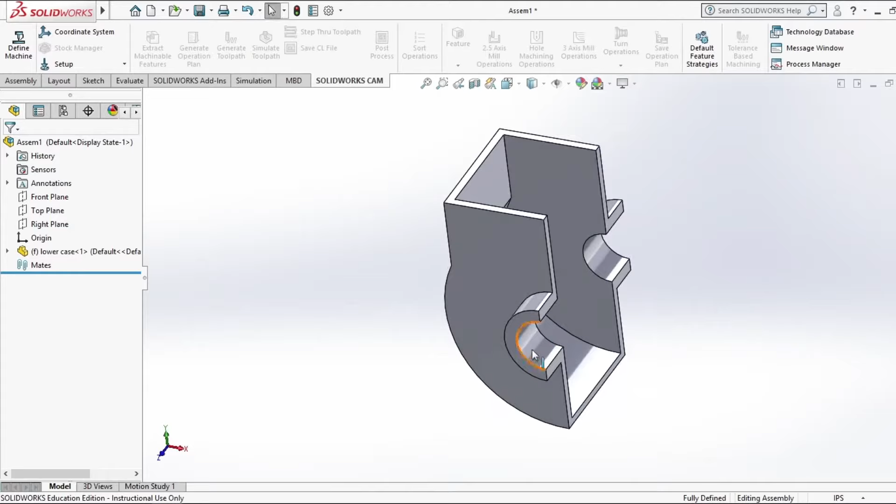So this piece cannot be moved. It is fixed. If I left-click on it, you can see it gives me the option to float it, which is how you can tell something is fixed. You can also take a look at the fact that it says fully defined, so we know this part can't go anywhere. This is a great place to start out with.

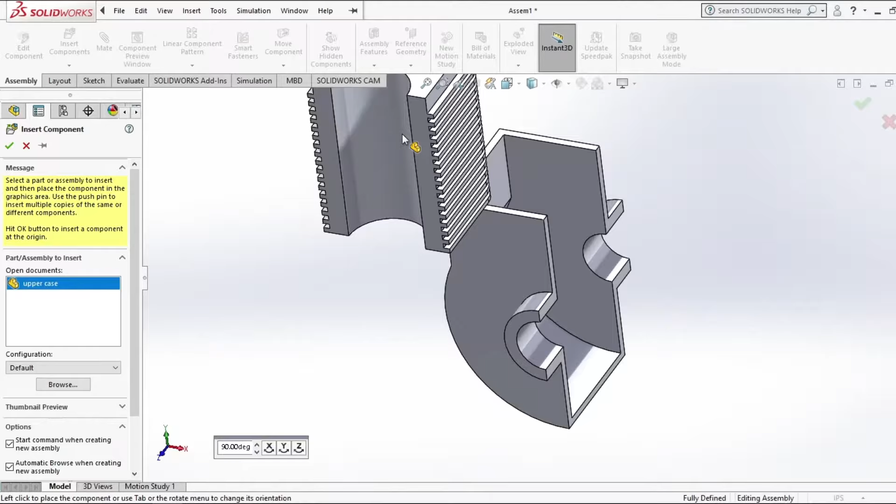So the next thing I'm going to do is insert another component. I'm going to go a little faster this time since this is something we've done before. So I'm going to grab the uppercase and drop it in place. The uppercase is actually the same, both top and bottom — it is symmetric, so we don't need to worry too much about it.

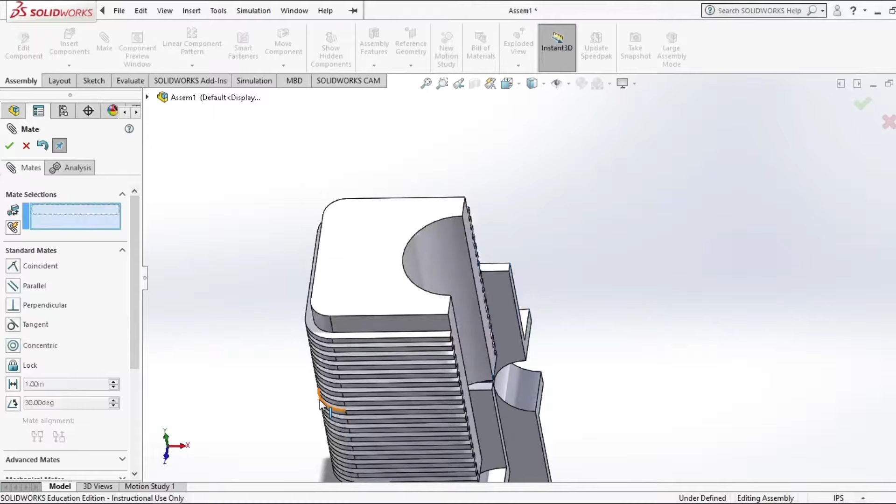So I'm going to choose the bottom of the uppercase and the top of the lowercase. I'm going to mate these two faces together and flip them so they're in the right direction. Luckily for us, they are exactly the same width, so we can just hit that button and everything lines up nice and neat. So that is how that is assembled.

I know that's got a sharp edge, but I wasn't feeling particularly good as a designer this week, so feel free to give me some flack for that later. So that's in place, fully defined, nice and solid. This is the case for the engine that we're building today.

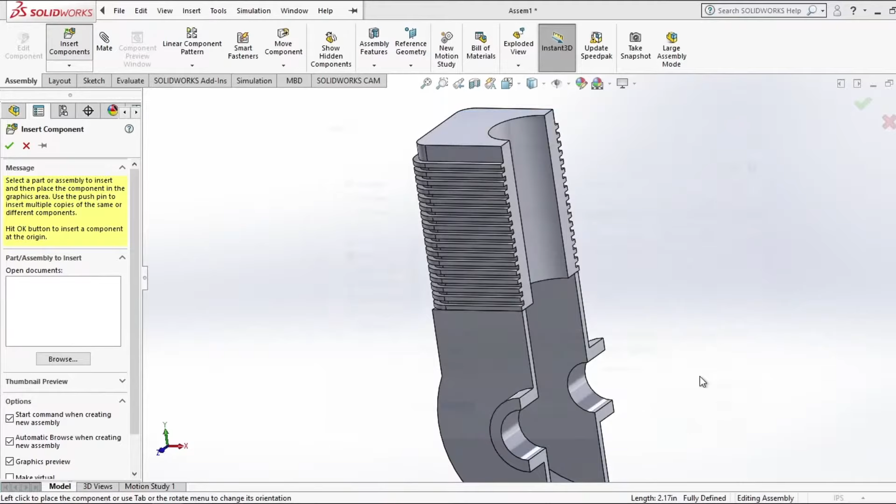So I'm going to hit mate, and insert components, and add in the next component we want to work with — in this case, the crankshaft. The crankshaft actually controls the crank directly, so we're going to come in.

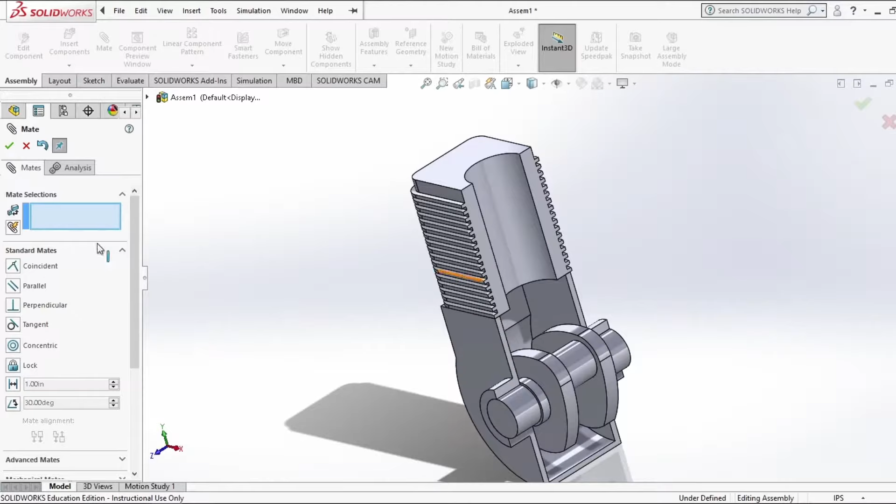I'm going to mate my crankshaft circles, and mate my crankshaft exteriors. If you've done everything properly, it should just spin in place right now. You'll notice it now says underdefined, but that's okay because it is where it needs to be. The next thing we need to do is use the actual crank itself, the crank rod.

So I'm going to drop that in place. This is a tricky mate to do, and there's two reasons for that. First and foremost, if I try to make this a coincident mate, I'm going to actually do that so you guys can see it. Do not do this if you're following along, until I tell you to jump back in.

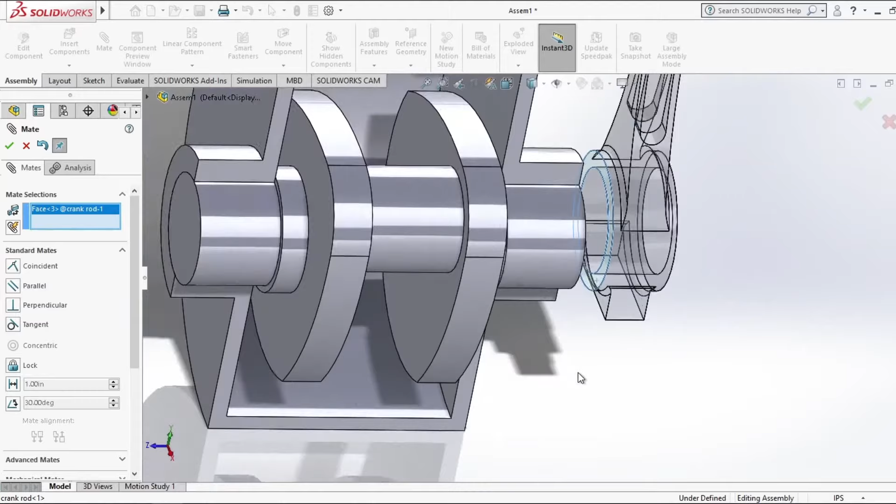I'm going to make this a concentric mate, and then I could hypothetically just go up to this wall, but the problem now is that the shaft I'm working on is not centered. You can see it's really off onto the edge. So while this system does work and it'll turn and do all the things I want it to do, this just isn't right because that's not where it's supposed to be.

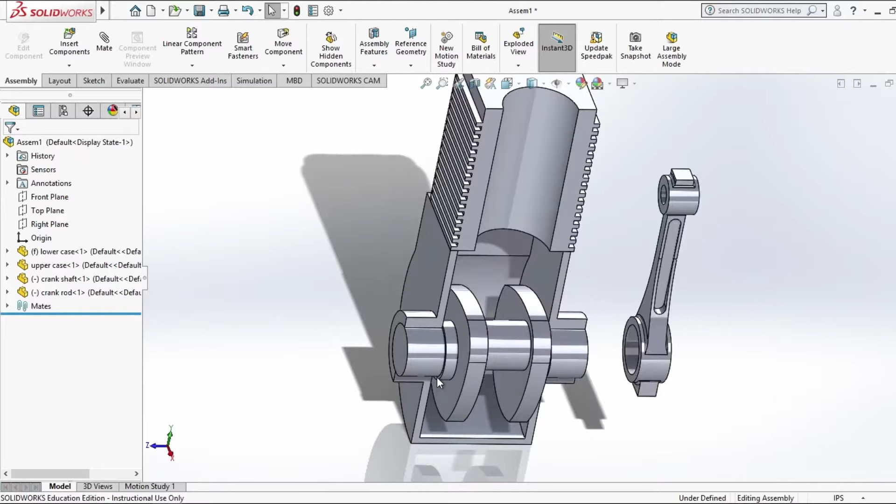So I'm going to actually undo everything I just did. It's going to get a little mad at me. There we go. And now, if you're following along, this is what we're going to be doing.

I'm going to start with that same concentric mate. That's important to make sure it stays on the shaft, and that way as this rotates, it follows along with that. But rather than use these mates, or a parallel mate, or any of these fancy mates, I'm going to go down to an advanced mate. In the advanced mate, there's this option for a width mate. The width mate actually lets me place two objects directly in the center of one another.

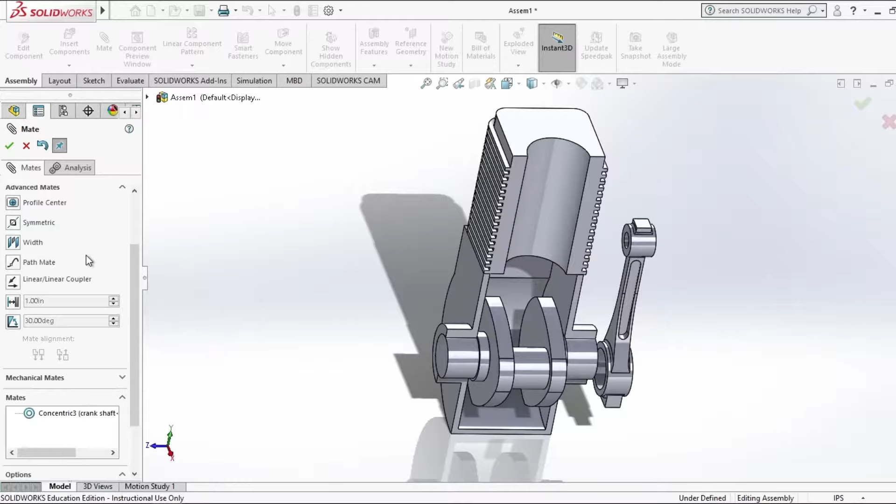So what I'll do is choose both sides of the crank rod, and then choose both interior sides of the crankshaft. You'll see right there, it's actually lined it up perfectly down the middle. This is a really useful mate for whenever you don't want to have to do measuring or get too crazy with it. You can just kind of center something and call it a day.

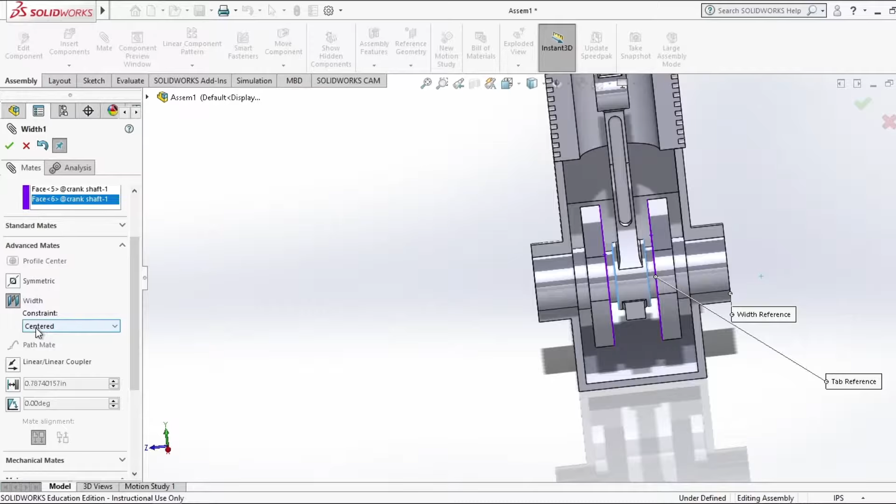There are other mates we could use for this that get into that - we could have a cam mate, or potentially even a hinge mate, which would work here. But we're just going to stick with that width mate because it's really nice and easy, and we can center it and it behaves very, very cleanly.

So I'm going to hit OK. And now you can see our crank rod is loaded onto our crankshaft. So we're in good shape, everything is sort of coming together. We've got one more part to add in here.

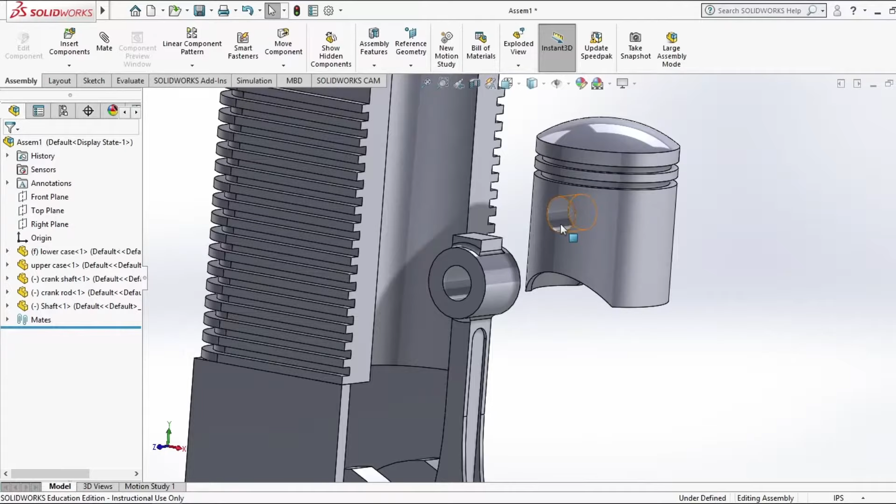I'm going to insert components, and grab the physical shaft itself - this is often just called the piston head. And we are again going to do a concentric mate. So this is how those will be mated together.

And then I'm going to mate the piston to the piston shaft. There we go. And so now this entire system is actually nice and neat and super clean.

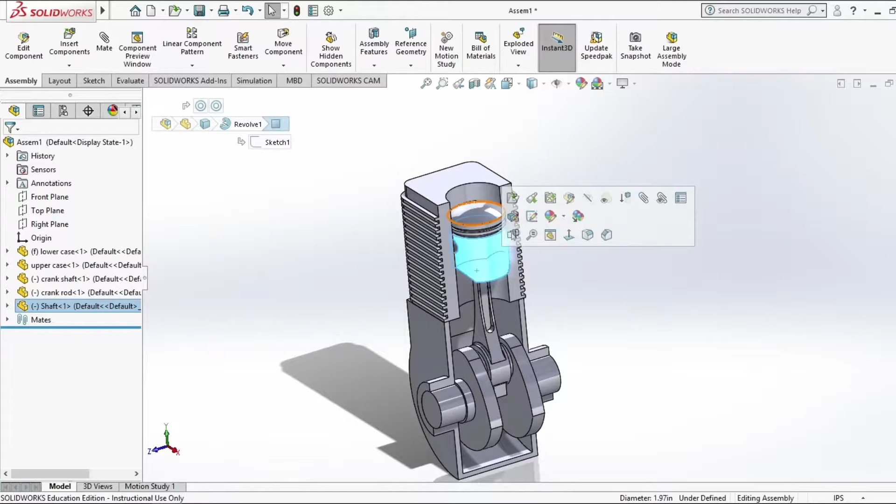I can come through and rotate this system, and see kind of how this reciprocating engine would work. So hypothetically, if this was a real engine, you would have some sort of explosion that would push down on the piston, and in pushing down on the piston, I would create some sort of mechanical motion down here. For the purposes of today, we're going to be doing everything from the crankshaft, so we're going to pretend this is just like a model of the system.

So I could sit here and just record my screen as I do this, but this isn't super professional. I want to actually come through and do some physics work on this, and kind of get a feel for how it should be behaving. To do that, I'm going to be doing a motion study.

Before I get into that though, I want to stress two things. First and foremost, to set that up, you have to go up here to your settings options and go to add-ins. You'll see here there's an option for SolidWorks Motion, so you want to make sure that is selected and just hit OK. If you're not seeing that, you can also just go to add-ins and make sure that is highlighted.

Sometimes if you're using SolidWorks, especially on your computer, just make sure that setting is there.

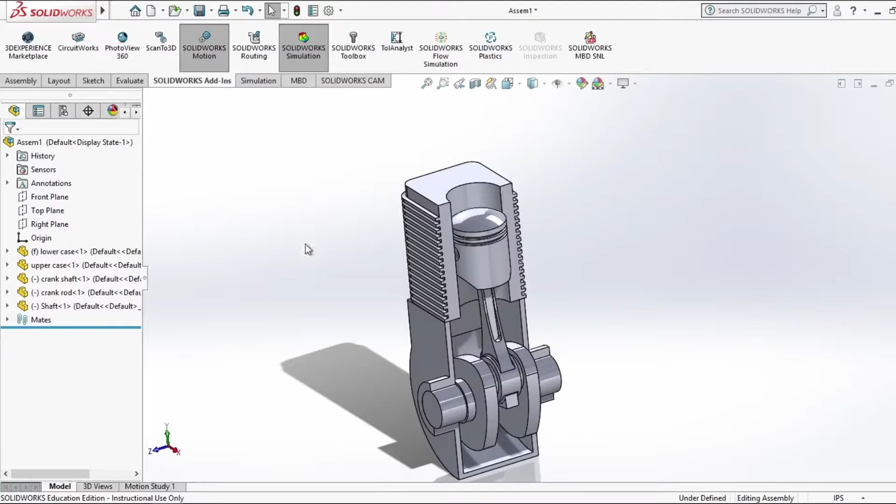When we come down here to motion study, up here on the left, you'll see that this is set up for animation. What animation lets me do is move my part and set a new time frame, then move my part again and set a new time frame, and so on. I can actually play it back to myself, depending on how that works. I did that badly, but the idea is we can go through and do that calculation.

But what we want to do is actually use physics, so we're going to go over to motion analysis. I'm going to load up a motion analysis option and drag it out to 10, so I've got 10 seconds of motion analysis to run. The problem is that while our system is set up, there's really no motion for it to know, because it has no forces acting on it.

So I want the system to have some forces so I can go from there. I'm going to set up my initial conditions like this, and I'm going to use the most basic of forces to work with, which is gravity.

If you'll notice at the top of this pane, there's a ton of different options available for creating different forces. I can add a motor, for example, to the shaft. I could add a spring, which, while this model doesn't have a spring option, could be useful for counteracting some force directly. I could add a damper, which is a way of damping two forces. This is oftentimes seen as something like friction, or you could be using something like a dashpot, which reacts directly to the speed of the motion you're working with.

I could add a force directly — for example, putting a force directly on the head of this piston to see how it behaves. I could even look at the contact behavior, so if I've got a set of gears, I could look at how the teeth are meshing.

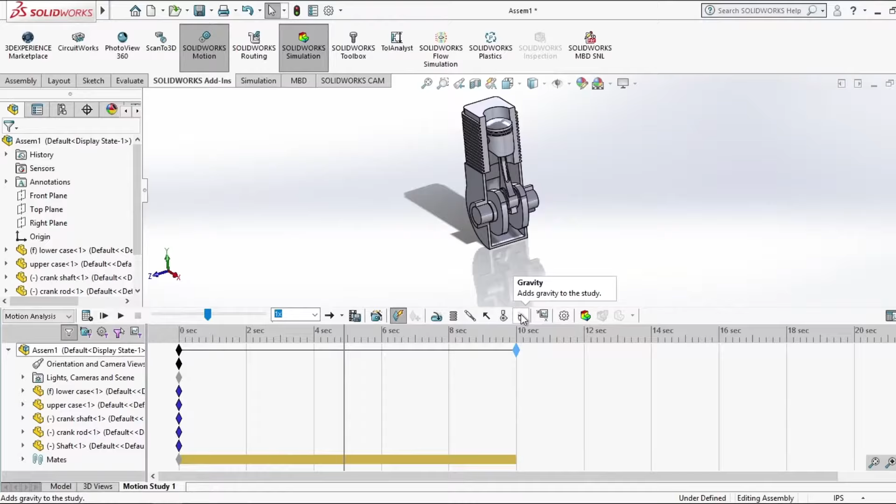But the one we're going to go with, which is just the easiest one, is adding gravity to the study. The reason is that gravity is a nice, easy thing to work with, and more importantly, it's important to add to most of the studies you're working on because it's going to be acting on pretty much any of your parts no matter what.

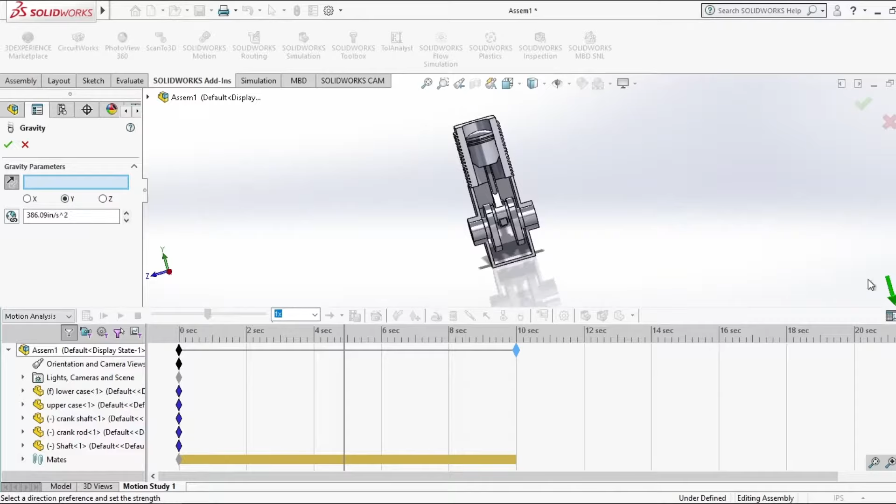So I'm going to click on the gravity icon, and you'll see over here on the right that it creates the arrow for gravity. If we were imagining gravity acting in that direction, not much is going to happen — I want to make sure it's instead acting downwards. In this case, for this model, that's going to be in the Y direction. If your model's hooked up differently, you can always play around with this to make sure it's pointing correctly. Just make sure your arrow is down, or in the direction of travel you want. Then I'll hit OK.

Now that I've added gravity to this, I'm going to hit calculate. This little calculate button is going to go ahead and figure out exactly what this system needs. You'll see that right now it's just rocking back and forth, so I'm going to go back to the beginning and see if it will let me recalculate that.

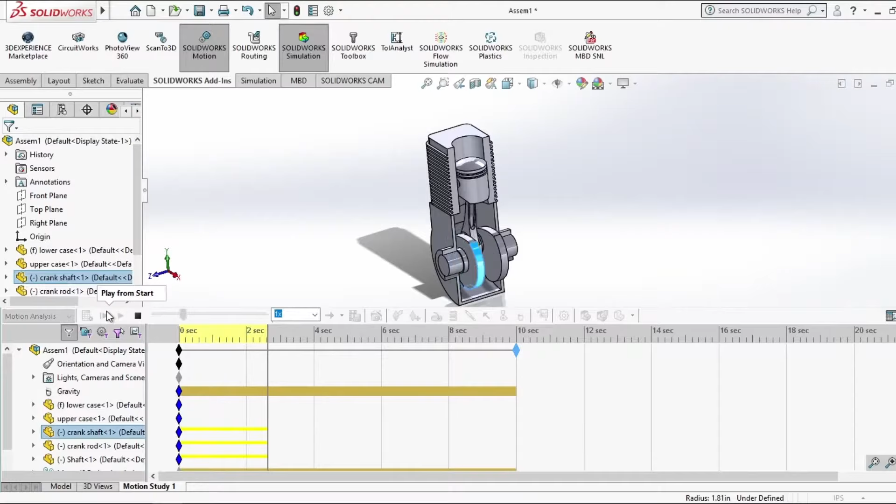There we go, that's better, that's more fun. So in this case, I just went back to the beginning and reset my model.

I can do that over and over again - just drag my timeline all the way back. I actually want it right there, we'll make it real dramatic. And I'm going to hit calculate again, and it'll resolve that calculation from that location.

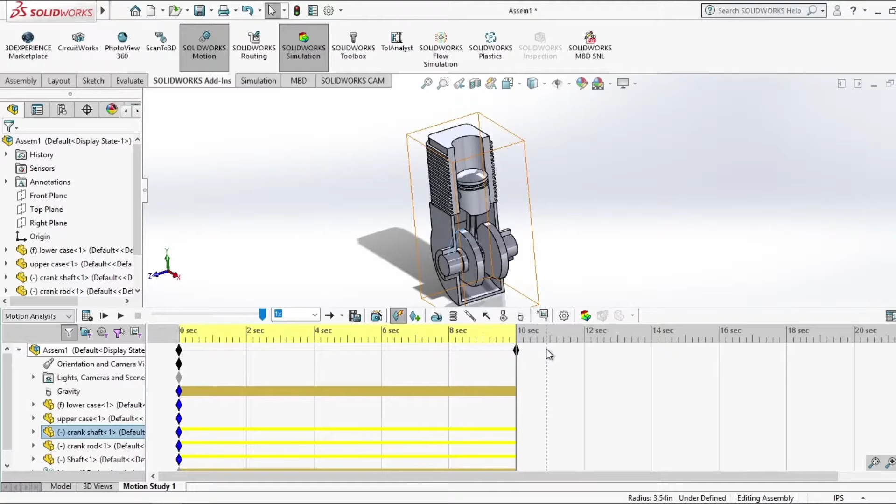So the downside to this model as described is twofold. Mostly, there is no friction, so this is just going to oscillate forever - no matter what I do, I'm going to get that constant back and forth. And second, as I'm looking at this, I realize it's kind of a really gross animation - not really nice and neat.

So I'm going to go over my settings real fast, and increase the number of frames to match my monitor - we'll call it 80 instead of 144. I think that's probably unnecessary.

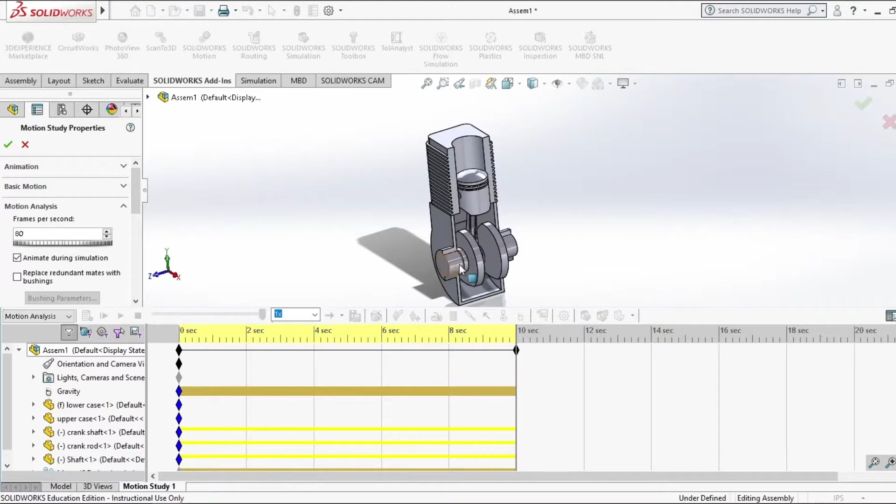I'm going to rerun this simulation one more time. You'll see it goes a little bit slower, but that is a much neater animation. It's not jumping all over the place, and I can get a feel for exactly how it's behaving.

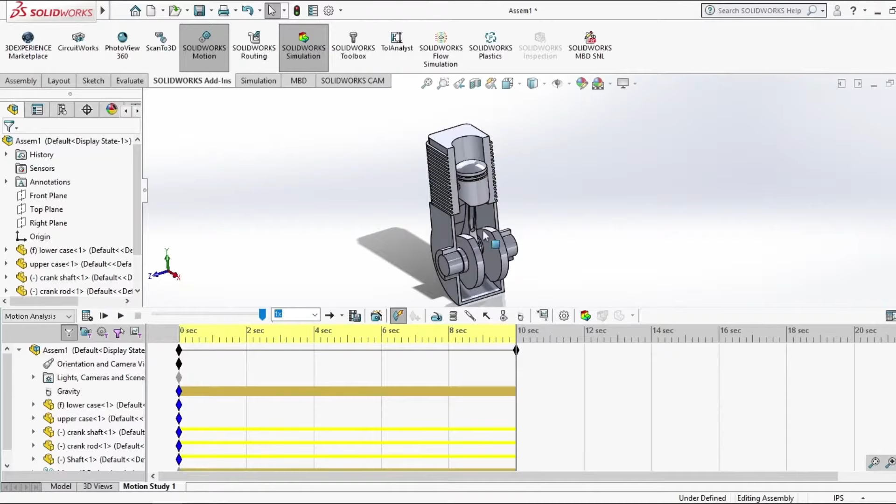Okay, we'll wait for this to finish up. And we can do a couple things here - we can kind of see how this system works just by doing a quick analysis of it as it stands.

So let's come on over here. We're going to hit this little XY graph button, and this is going to let us look at our results directly. I'm going to specifically be looking at the displacement of our model - the linear displacement of the piston itself.

You'll notice there's a ton of different options here - I can look at acceleration, I can look at velocity. Just linear though, that's what we're doing today. I'm going to be looking at the magnitude, the total magnitude of displacement for the system, and I'll just choose the face of the system for my output.

I'm going to hit OK, and it'll show me exactly how much linear displacement in inches this has. So it's displacing from 8.1 inches to 9.6 inches, just going up and down, up and down. This is in relation to the origin of the part, wherever that is.

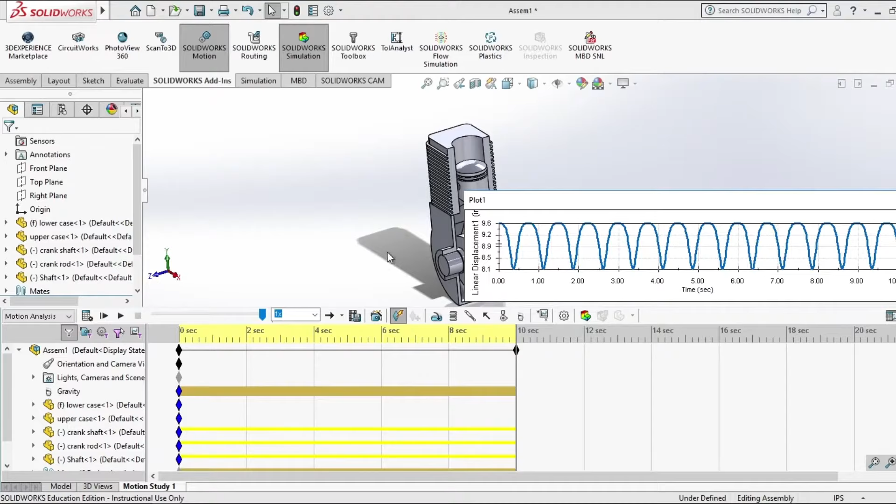All right, this is super helpful, but again, this doesn't look super real. So what I want to do is add a force to this that will compensate for that. I'm going to be adding a damping force, and the reason is that damping forces are a pretty good way of approximating some frictions.

For this problem in particular, I'm going to be using it just because it behaves a little bit nicer. So I'm going to be adding a torsional damper - like there's the big engine attached to this, and it's adding some resistance, and the damper is going to be attached right here.

And as I scroll down, you'll see that it gives me how much torsional damping I have - that's 1 pound per inch, or 1 pound force per inch. That is a lot, like a lot of force. In general, if I was to run the simulation, I doubt it would even move with that.

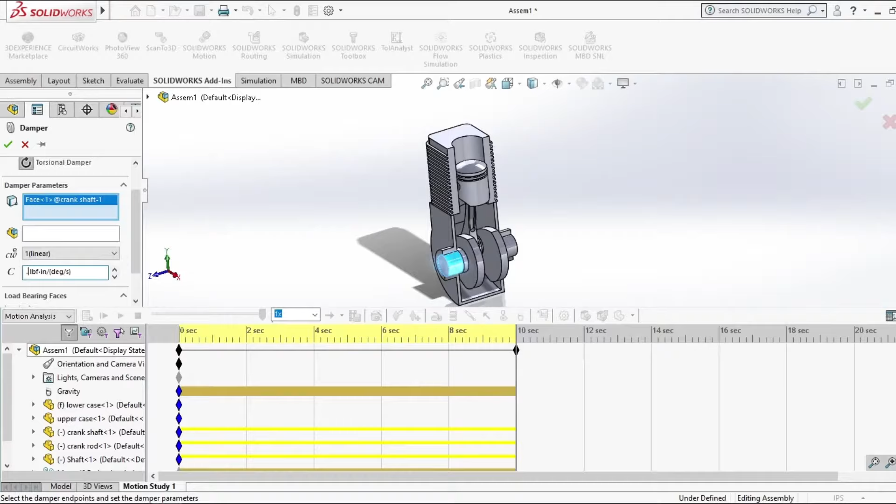So I'm going to drop this down pretty aggressive - down to like 0.001. And you can see how much just adding even just that little bit of damping force changes how this system works.

So I'm going to recalculate from the beginning, and you'll see now it is dropping down. And then the damping force is actually stopping - the damping force is keeping it from jumping back up.

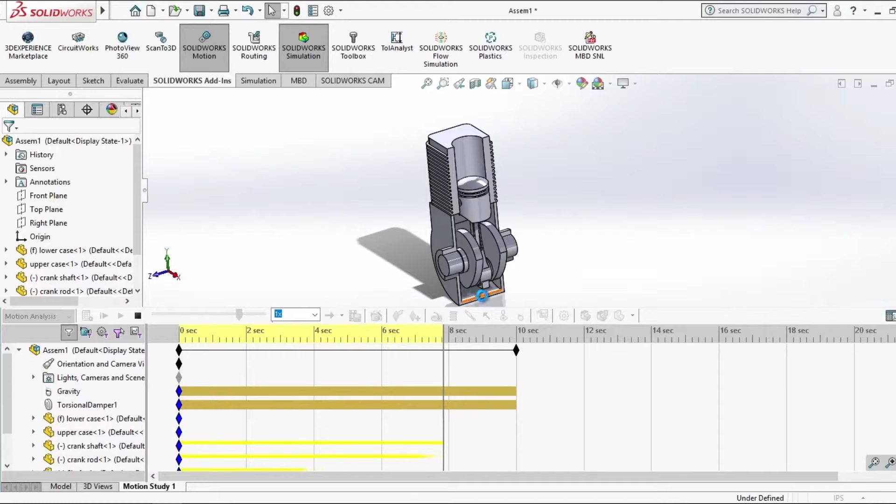All right, so the eagle-eyed among you may have realized that my screen just jumped around a little bit - that's because I crashed VLabs. So make sure to save frequently. I'm glad that I did.

But in general, yes, I'm just going to real fast save this out. We're just going to put that on my desktop as...

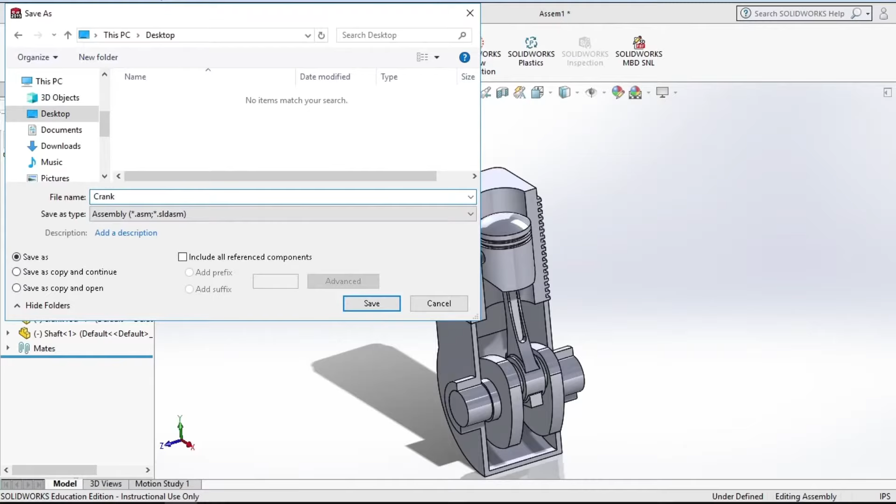I'm sure I won't forget that this is there, so I won't do that again. Let's jump back into that motion study now.

Taking a look at this motion study directly, you can see that I have a linear displacement plot, and it behaves the way I would expect, where it drops down and then hangs out there as is.

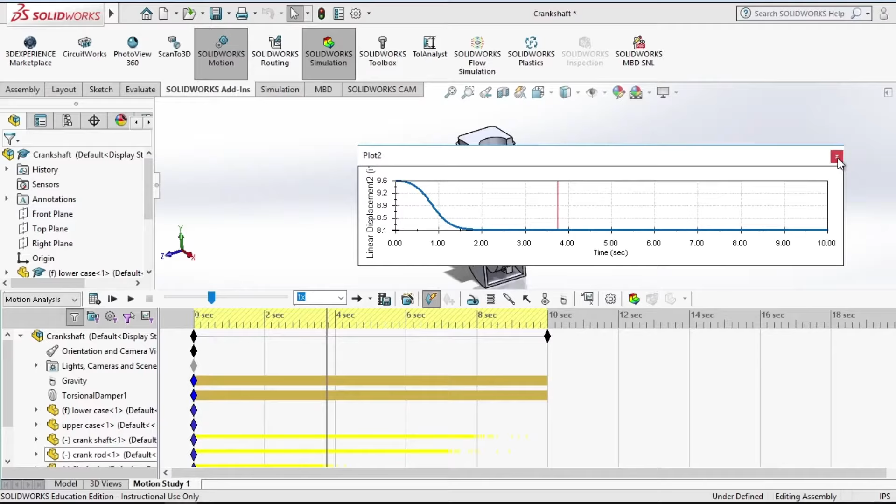This is all well and good, and I can play with it a little bit and say, what if I want my initial condition to be someplace like here? I can recalculate and see how this system would behave differently depending on how things are going.

I can also go over to my system and modify what I am seeing with that damper. I'll stop, edit my feature, and change this value around as I see fit. For example, I could decrease my damping a little bit more by an order of 10, and remodel that to see how we are behaving.

Let's recalculate real fast. You'll see that gives me more of what you might expect from a system with really smooth bearings and no load attached to it.

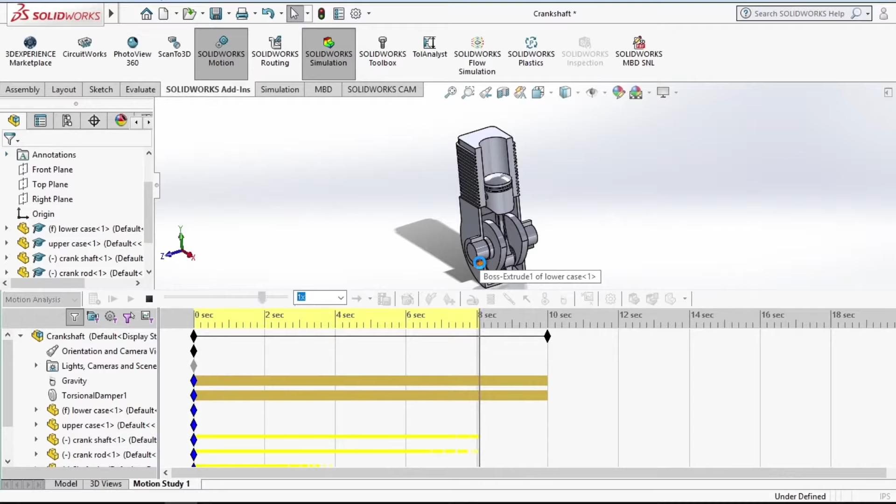That's actually the hardest part of simulation, getting a feel for what is and is not reality. Because sometimes you're going to work on a part and it's going to look completely normal to you, and then you get to the real world and find out none of this works as is.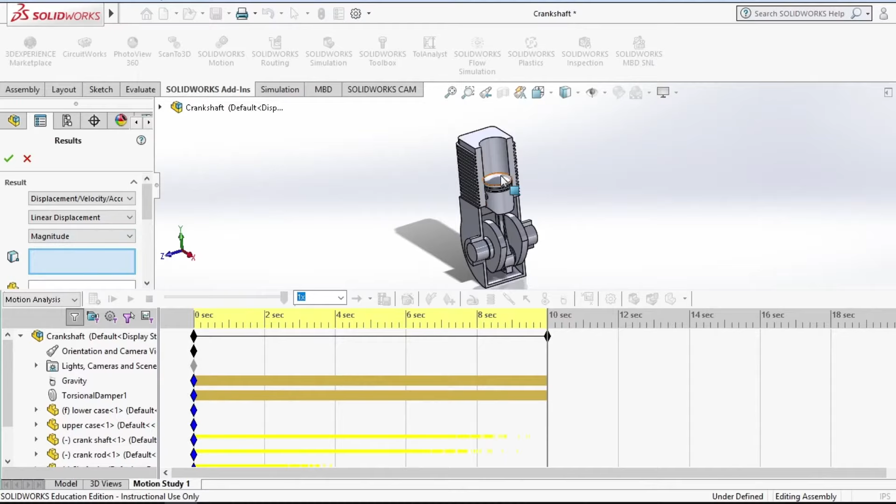But this is the really helpful part of this system, I can come in here and continually check to see how my part is behaving. So I can come back and say, how did that simulation work? You'll see here I've got that structure we just saw, that kind of bounce, bounce, bounce.

I can actually play this alongside to see how accurately it matches or where that's happening, and it'll load that alongside so I can get a feel for where the system's working.

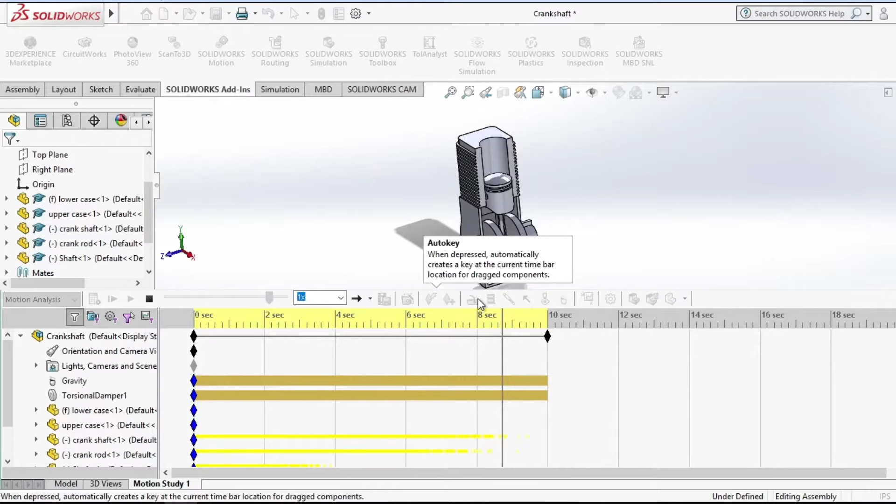This is all well and good, but it's not super helpful to me, because at the end of the day, I really want to determine how the motor would affect this and what that's going to look like. So I'm going to add a motor to this system, and pretend I'm driving this like it's some sort of prop at the Museum of Science.

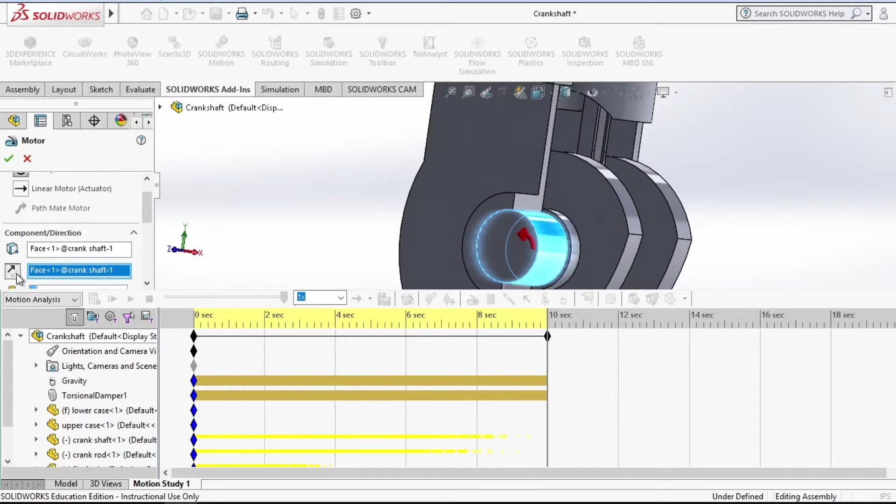I'm going to click the shaft I want the motor to roll on, and you'll see that it immediately gives me a direction. I can change that direction by clicking this over here, but I'm going to leave it clockwise for now because I think that's kind of nice.

I'm going to shrink this down a little bit so we have more window room. I'm going to run this motor at a constant speed of 100 RPM. Actually, let's make that 10 RPM, that's nice and slow and makes things nice and easy.

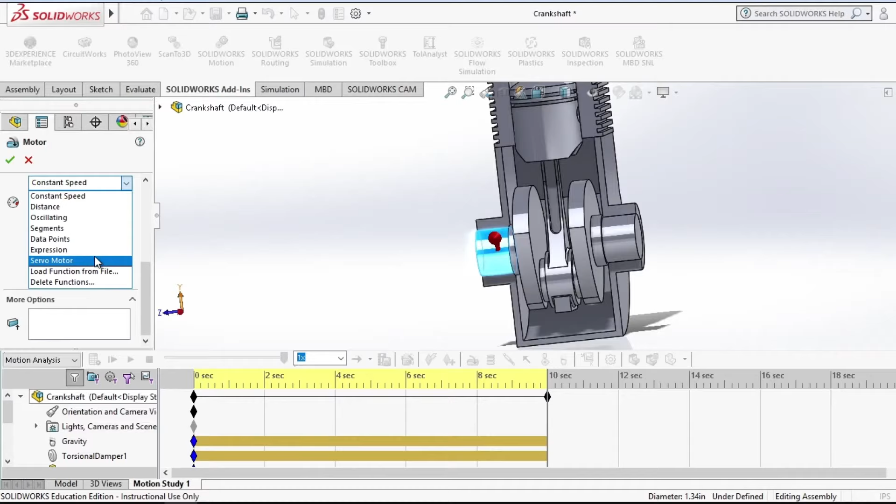You can go ahead and modify this graph to change the actual structure you're working with. So if you've got a specific ramp up or oscillatory behavior, or a servo driving the system, you can do that too, but we're not going to do that right now. So I'm just going to hit OK.

And I'm going to recalculate my model. What you'll notice here is that in this model, the motor is now constantly driving this system, so we no longer see the effects of gravity, but we know that they're still there because we haven't removed them.

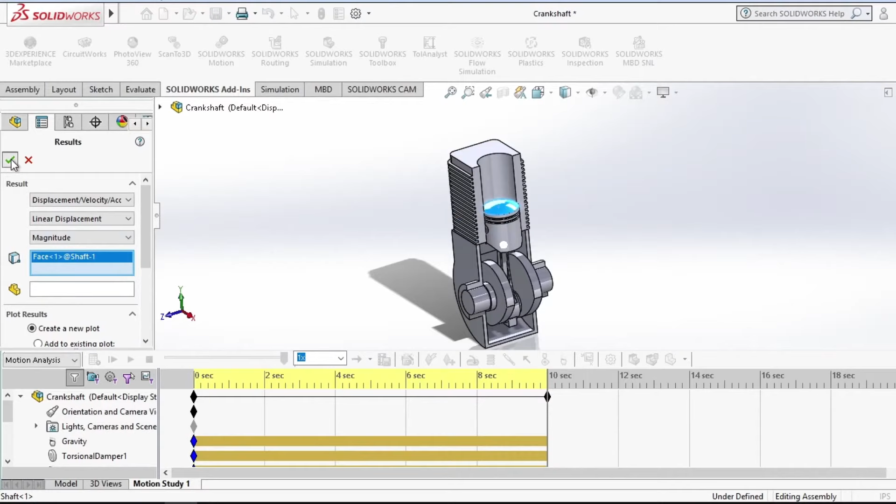Now that I've got the motor driving the system and gravity acting on it, I can look at how the system behaves and say, obviously displacement is going to be kind of a harmonic structure. So let's double check that: linear displacement, magnitude, choose the top there. There we go, we see we got that nice harmonic and periodic structure.

But realistically speaking, the amount of force needed must change based on how gravity is working. So I'm going to go real fast and do that same system, looking at the force instead. I want to know what the motor torque requirements are, and again, magnitude.

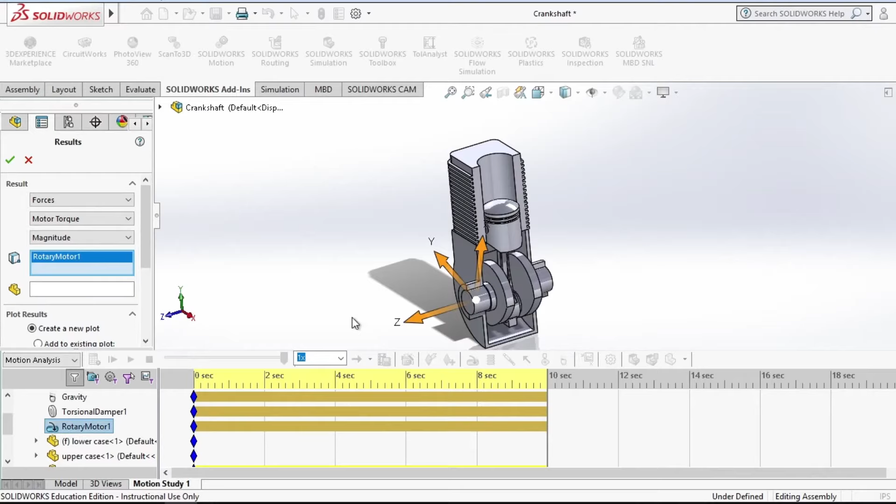I'm going to grab the motor from down here. You can't grab it on the page because we don't have a visual representation of the motor. I'll hit OK, and you can see that this system is now showing me how this piece works.

I can step through this, and I can see that when the piston is higher, I require less force to continue turning the motor than when the piston is lower and pushing it back up. If you think about it, that means the piston's energy is actually being handed back to me.

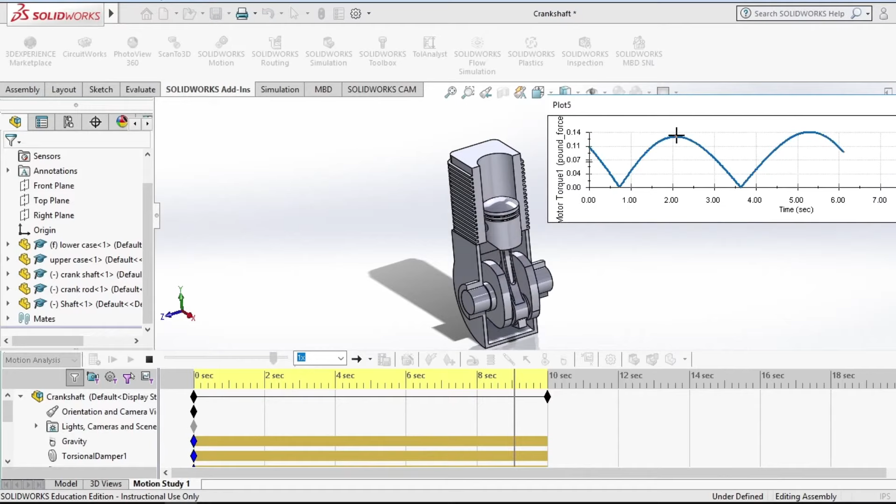So when you guys run the simulation with your own specific values, you'll see that your torque value will change depending on the damping ratio and the speed you're running your motor. All of those pieces affect how much torque is needed to move the system. This is really cool because with just this very simple tool, I can get a pretty good idea for what kind of dynamic structure I've got without having to leave the simulation workspace.

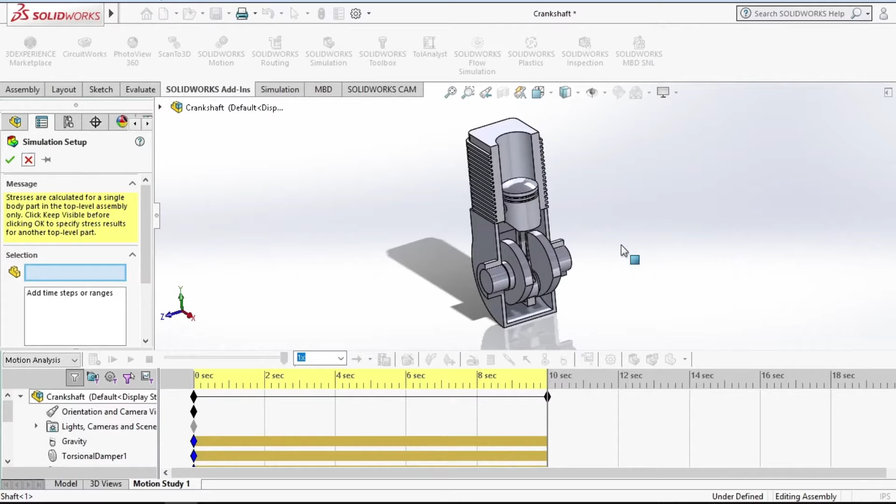Solidworks can do a lot more than this. You'll see over here there's the option for doing actual full simulations, so we can check and see how a material is deflecting or being affected by a specific action. I'm not going to do this because it can be computationally intensive, but we can see the stresses in this part as it's moving, and see the locations where you're going to see the most stress during operation.

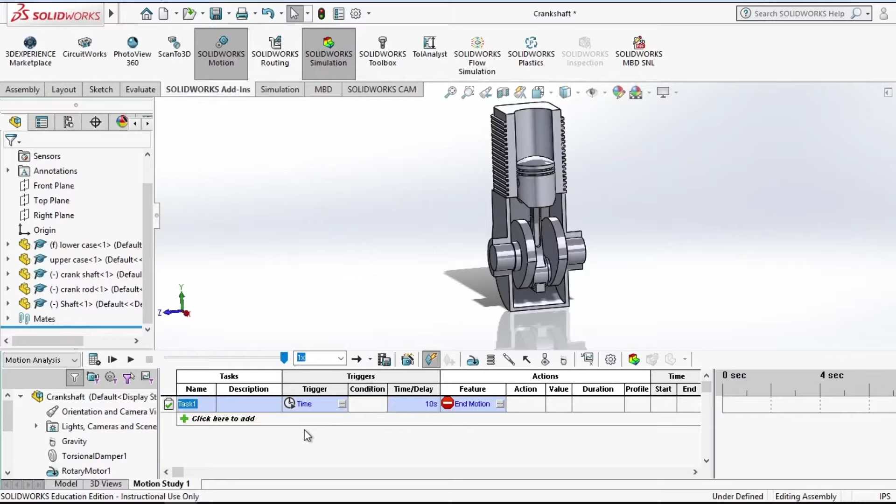You can take it a step further, and if you like automation, you can do event-based structures where you add sensors to this motor and say, rather than try and fire this motor with just a camshaft, I could have some sort of servo motor or solenoid firing my piston, and when it gets to a certain location, I need a fuel injection, and add different tasks depending on how that's going. This is a much more advanced version of Solidworks, but it's really helpful if you're trying to do something like a production line. And you can go even further than that.

You can add additional forces, additional dynamics as necessary. My personal favorite is the contact option because it lets me see how everything is interacting, whether I've got rubbing or parts that are mashing into one another causing them to bind up. I think that's super, super helpful.

So for the purposes of today, your goal is just to get this piece together and make the modifications I ask for in lab. All you have to do is run and give me a quick AVI of this as well as the graph outputs. To do that, we're going to do two quick things.

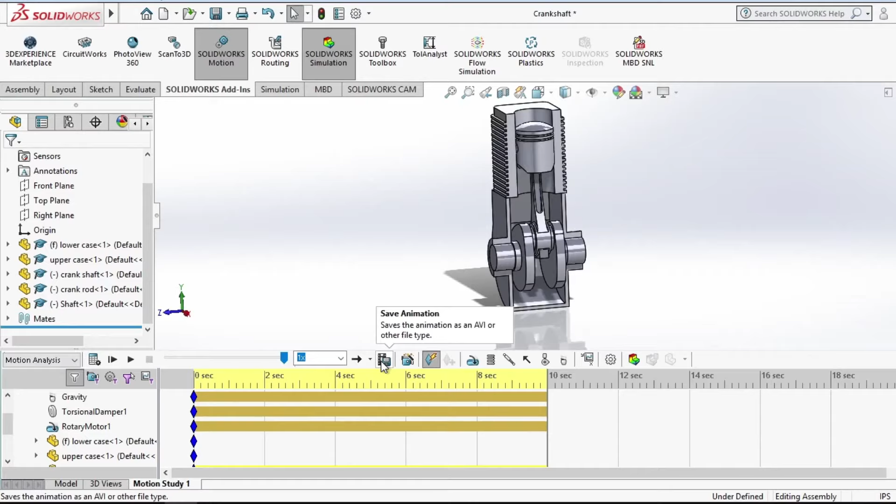To save this file out, I'm going to click the Save Animation button. This is great because I can literally just save out a quick AVI of what I'm working on. You can use a really high compression quality - I tend to just give it like a 50, that's just me being lazy. It'll run through this animation, and I can go directly to my desktop after this, and I've got a really nice animation I can include in my presentations.

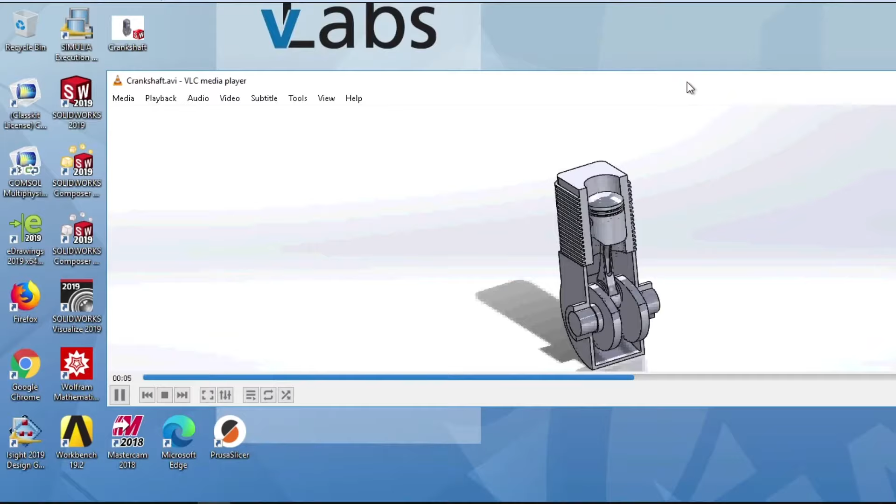So I can throw this into a PowerPoint and have it running in the background as I'm describing how whatever it is that I'm working on works. If I'm being honest, I'll normally turn these into GIFs and put them into my PowerPoints directly, because that gives me the ability to do a fair amount of presentation without having to worry about where they're coming from.

The other thing I can do is, let's say I get a result that I'm not expecting. So I'm going to grab something you guys don't have—the translational momentum magnitude. Hit OK, and there's my translational momentum.

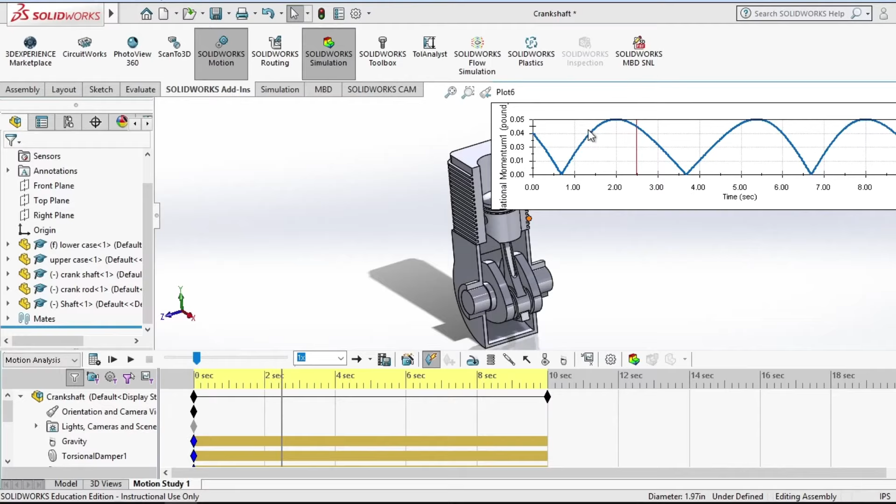Honestly, this is harmonic behavior, so I'm not super surprised by this, but you'll see it has a little bit of an expansion arc. It's not a perfectly centered arc.

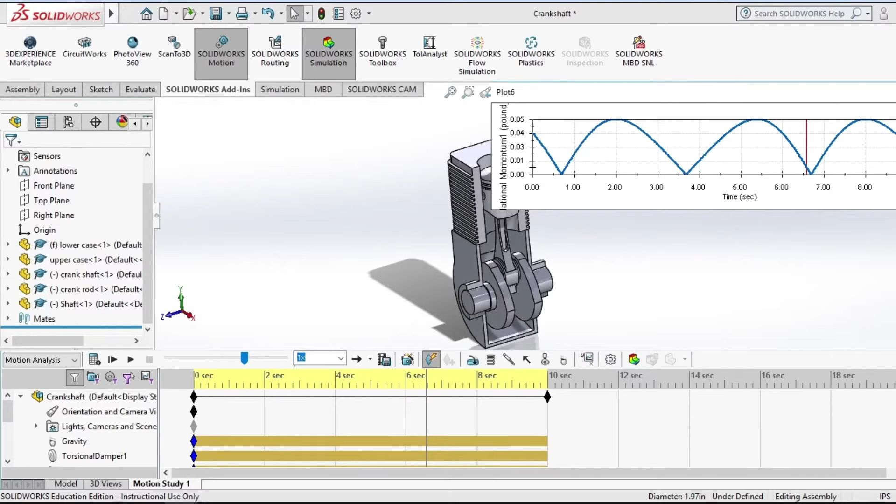So let's say I want to do some analysis on this. Well, SolidWorks isn't great for that, but I can right-click on it and hit Export CSV. This will actually give me an Excel file that I'm hoping saved on my desktop. There we go, and I can open this Excel file and start doing some data processing on it.

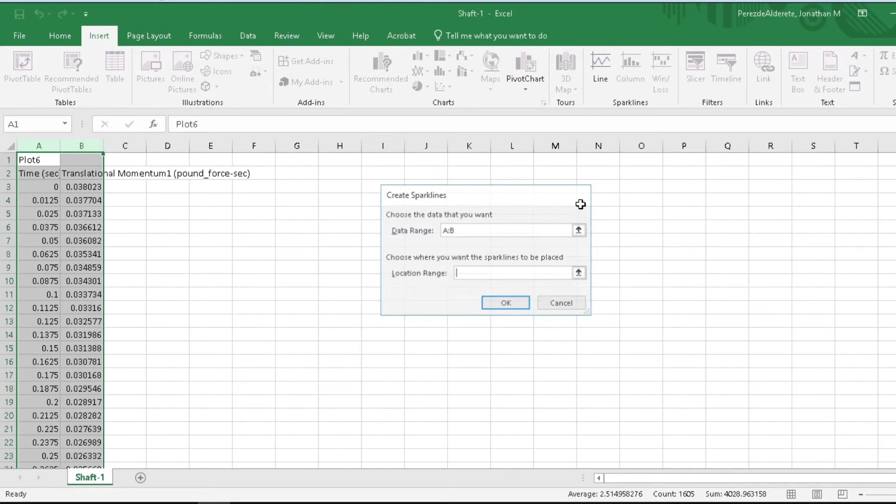Or I can open it without installing anything—I know you're about to give me another warning, but I guess not today. Okay, cool, so I can take this data, drop it into Excel, and do a fair amount of the analysis I would normally do right here without getting too crazy. I could also drop it into MATLAB and do the same thing, but this is really useful when I'm trying to generate a report or get information about how my system is running.

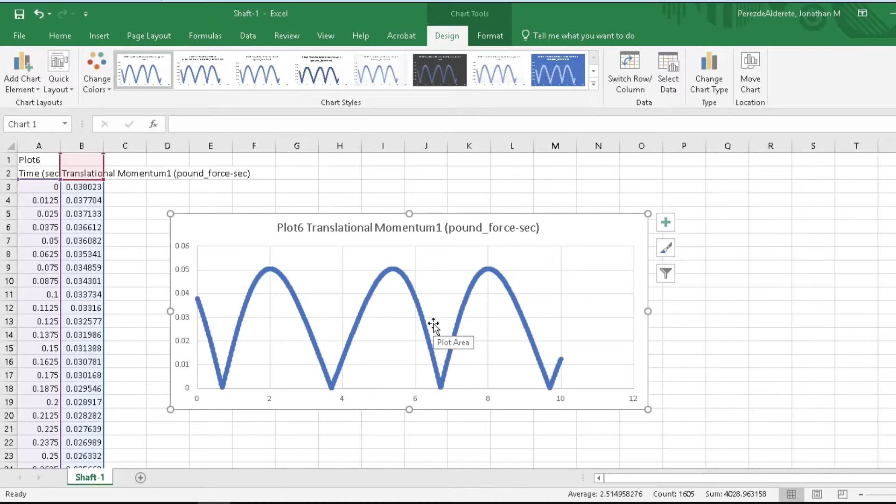When you guys are working on your final project, we're going to ask that question: the gripper that you're making, how is it behaving? What are the components of this and what does that look like? Getting into the habit of this is super helpful because it gives you a lot of tools in the future to start modeling these parts.

I will say this is not a cure-all, and I think it's important to throw this out there because there's kind of this want for, hey, does this system do everything you need it to do? Kind of. But what matters is that if you don't know what it's not doing or what it's doing wrong, it can be really easy to have it mislead you.

For example, I could hypothetically—and this is not something you need to do—edit a feature and say, alright, I need this to run at 1 million RPM. I don't think I know of a bearing that could handle that kind of behavior. And because this is just a program... oh, nope, it's stopping me at 100,000. Alright, we'll do 100,000. Please never run anything at 100,000.

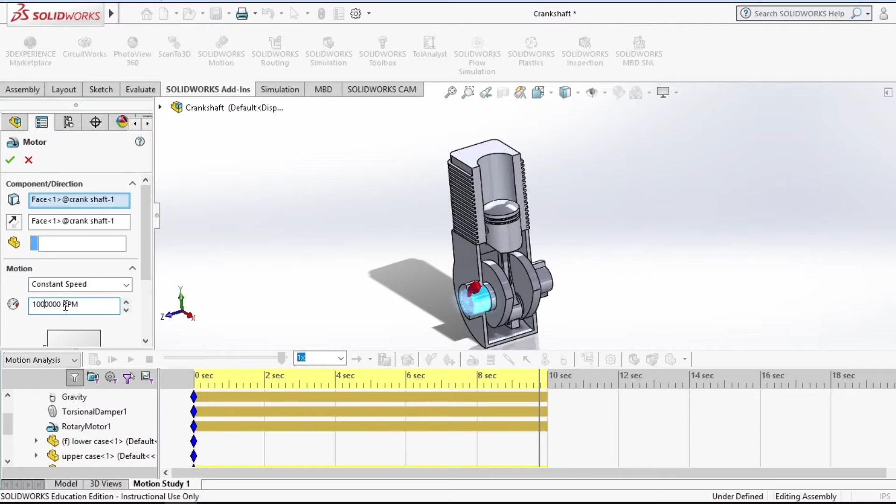I could rerun and redo this entire program, and you can see that this entire system is just going nuts. I would actually have to severely increase the speed, or the resolution, of my system in order to get this to work.

But if I didn't know better, and didn't know that realistically running this motor at that speed would be impractical, I could hypothetically go to my boss and say, hey, this is something that could happen. So knowing the physical limitations of what you're working on is really important, which is why we have you take classes like statics and dynamics, where you get a feel for the back-of-the-envelope calculations that make it possible to determine if your simulation is reasonable or practical.

Again, if you guys have any questions, feel free to flag us down—we'll be more than happy to help. I'm going to try running this animation real fast just to see where it goes in a few seconds. This is a nice, easy walkthrough before you jump into the next portion.

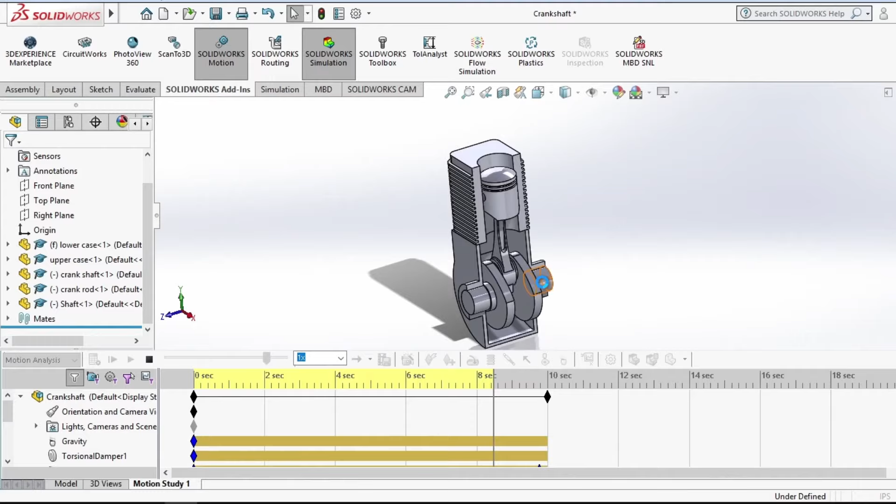So what we're going to be asking you to do this week is, in addition to this system, design a piece for a cityscape for a demonstration, and also for us to use as your mini project for this unit.